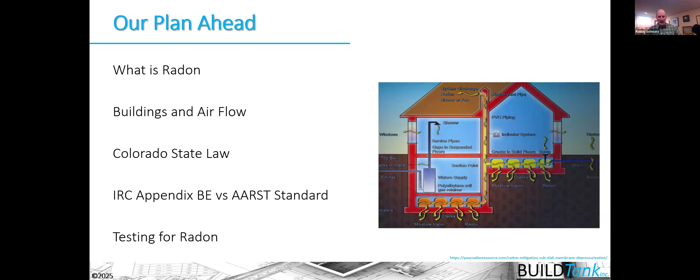Today we're going to be talking about radon. We're basically going to do an overview of radon and radon issues in our new houses. Our plan is to talk about what radon is, building and airflow, and we need to talk a little bit about the building science. There's a relatively new Colorado state law governing how radon is being tested and mitigated in our buildings, so we need to talk about that in relationship to how the International Residential Code appendices work and the standards that the state is referencing that isn't the International Residential Code. Then we'll talk about radon testing a bit as well.

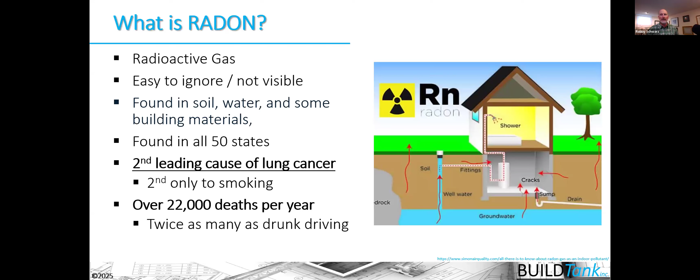So why do we want to talk about radon? Radon is a radioactive gas that's pretty easy to ignore because it's not visible, and we can't really taste it or smell it or anything like that. So it is something that has been ignored for far too long. And we know that it's been ignored for far too long because it turns out that it's the second leading cause of lung cancer in the United States and causes a significant number of deaths each year. So we want to make sure that we are taking it seriously and ensuring that we're trying to keep it out of our houses here.

So testing for radon hasn't been a commonplace thing until really recently.

We really started testing in the 1990s when it became a more active understanding of radon in our houses and how it's affecting us. If you're interested in hearing more about the history of radon, I'll do a shameless plug for my podcast where I spoke to a professional who researched radon's history back to the Middle Ages.

It's an interesting talk about how we got to our modern day lives, the building of nuclear plants, and how we came to understand radon's importance in our modern homes. Indoor radon levels have been rising in our houses because we haven't really understood the sound building science that governs how air flows and moves in our houses, and what air is carrying in our houses. So we've been building our houses to meet our modern day expectations.

One of the things we've been doing is building our houses tighter and tighter. But we also need to ventilate that house correctly so occupants can gain control of airflow, moisture flow, and thermal flow, which you've heard me talk about quite a bit. We also need to incorporate this idea of controlling radon gas from entering our houses before it causes a problem. So we're going to talk a little bit about the building science there.

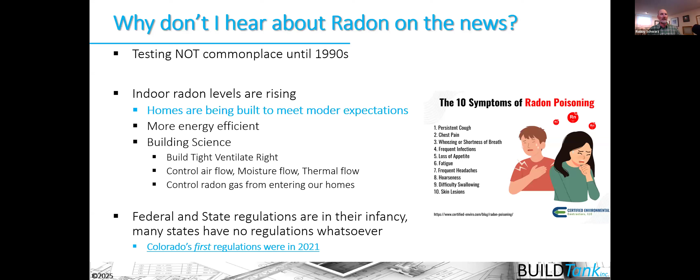Federal and state regulations have really been in their infancy. In 2021, Colorado began to regulate radon testing and mitigation and who can do that, making sure people have the right credentials to work on our houses. This has created a little bit of not conflict, but there is a chapter in the IRC that talks about radon, and that chapter and appendix has changed a little over time from the 2018 IRC.

We called it Appendix F. Now in the 2024 IRC, it's Appendix BE. But that appendix hasn't changed that dramatically. They define radon gas in the IRC as a naturally occurring, chemically inert, radioactive gas that is not detectable by human senses. It can move pretty readily into our houses because of the building science wrapped into how air moves in and out of our houses.

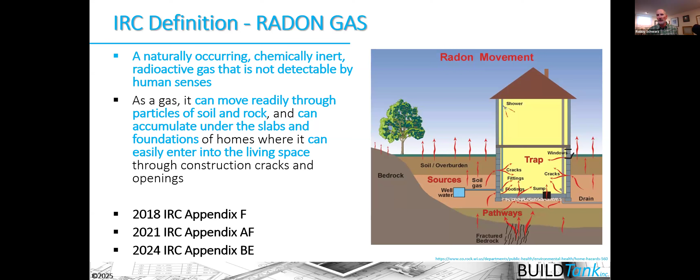So we're going to utilize the IRC appendix as a way of talking about radon, but we have to understand that the state is looking at radon testing and mitigation using a different standard, developed through an ANSI standard development process. Jurisdictions around the state are utilizing these appendices from the IRC.

So when you're looking at radon in our houses, we need to think about radon resistant construction, which is largely governed by the IRC. But again, we need to think about it in relation to the IRC, but not just the IRC, but also this standard that I'll introduce you to in a second.

The reason it's so important is there's a radon map that the Environmental Protection Agency put out. In our state, Colorado, we see that we have radon zone 1 and 2 throughout the state. We don't have any areas of low radon potential in our houses. If you're building in radon zone 1, it's still not necessarily determinate of whether that house will be capturing more radon, or that you have to do more mitigation than anybody else, because it's really site specific and depends on the soil conditions underneath your house.

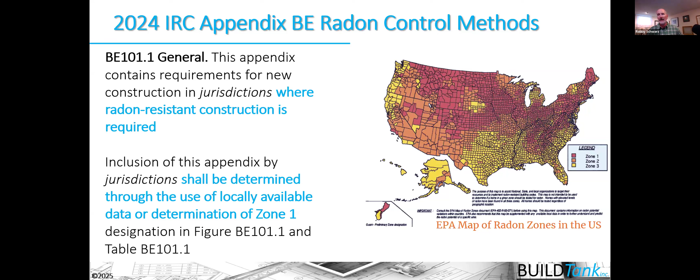So this radon map is giving us the potential. You have higher potential for radon in radon zone 1 than you do in radon zone 3. The idea is that we should take that seriously and build radon mitigation systems in all our houses that are in radon zone 1 and 2, so we can better ensure not only the safety or comfort of our buildings, but also the safety of the occupants in those buildings.

In 1910, people were willing to work with that house. They were willing to put on a sweater, shovel some coal, or put a log on the fire to keep warm. Where in today's world, in a modern house, we really want to walk around in our underwear from room to room and floor to floor and be comfortable in that house.

That really means we've had to change the way we build our houses. When we began this change, we had quite a number of failures. Then we began to understand the science of how houses interact with the environment around them. And we're now able to build a house that's efficient, safe, and durable, and also meets our modern day expectations of comfort.

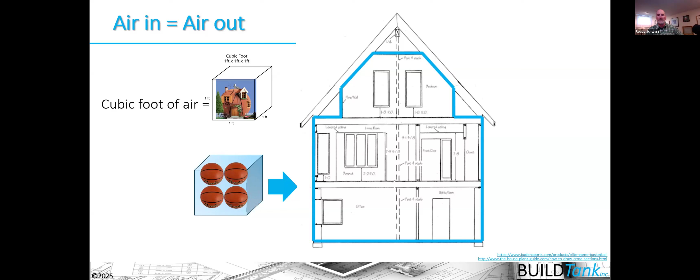Whenever a quantity of air goes into the house, a quantity of air has to leave the house, or vice versa. If air goes in, it has to go out. If air goes out, it has to go in, in relationship to the building thermal envelope and the fixed quantity of air that envelope captures.

So there's a specific volume of air inside every single house. If a cubic foot of air leaves the house, then a cubic foot of air has to be replaced and come back in, and vice versa. We always talk about air in relationship to houses as air in equals air out, or air out equals air in, because there's this specific volume of air that you can calculate.

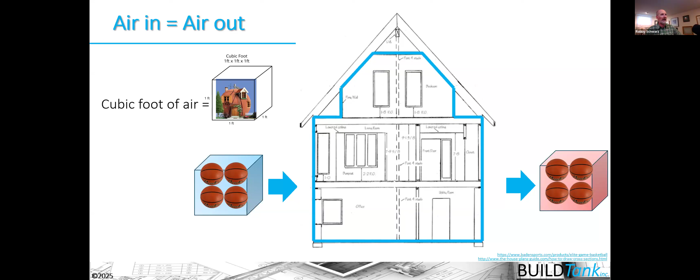And in fact, you need to calculate it in order to do a blower door test, which we talked about last week. But the other interesting thing about air is that it's not necessarily smart.

It doesn't necessarily know that if I open a window, it's supposed to go in that window and ventilate that house or cool it off and then go out the other side. Remember, we talked about last week that we need a hole and we need some sort of driving force for air to move through that hole.

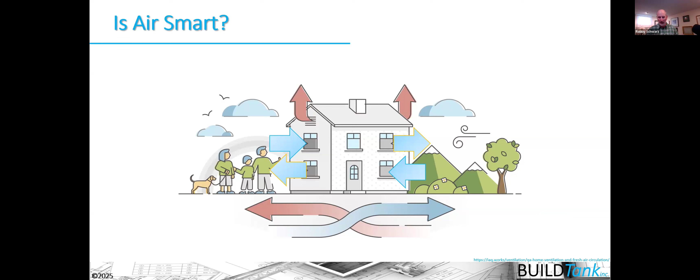So when I've got a house built over a crawl space, for example, I can define the building thermal envelope as excluding that crawl space. But when I put vents in that crawl space, I can't tell the air it has to go in through this vent and then go out through that vent. It might do that, but it's not necessarily going to do that.

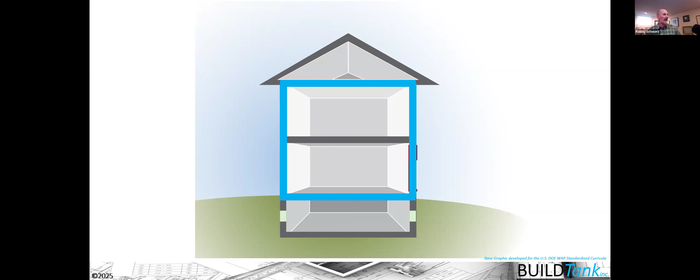The laws of physics are working against that air because we have this thing called stack effect. Stack effect is one of these things we call a driving force, something that creates a difference in pressures. If I have that pressure difference across the boundary and I have a hole in that boundary, then air in this ventilated crawl space, instead of going from one vent to the other, is actually going to act as a low side hole.

What happens with stack effect is that when air warms, it naturally rises. So as air comes into the crawl space, even if it's 0 degrees outside, it won't be 0 degrees inside that crawl space. The air coming in that vent warms and hits the bottom plane of the building thermal envelope. If there are holes across that envelope from plumbing vents, HVAC vents, or other penetrations, that air continues to rise as it warms, enters the house, and continues to rise to find a hole on the high side of the house and leave. So as it's leaving on the high side, it's coming in on the low side.

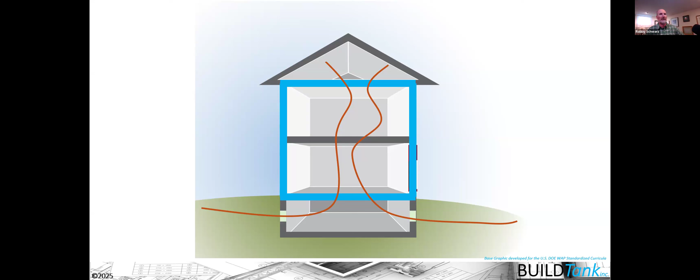In the IECC, when we talk about making houses tighter, we concentrate on the high side holes and low side holes because we can't impact this natural physics of air warming and rising. So when we think about air, not only from a building science perspective, we also want to think about air as a freight train, a transport mechanism that carries heat, moisture, and pollutants like radon in and out of our houses. We need to gain control and predictability of airflow because that air is carrying these things in and out.

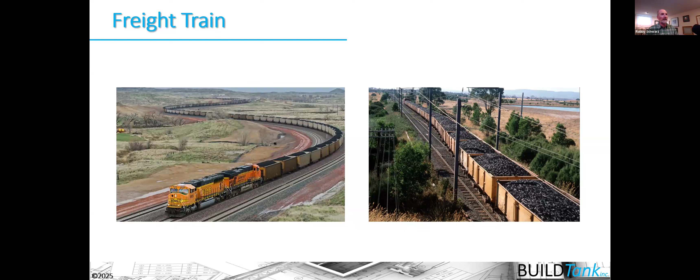How it's carrying it is through driving forces across our building thermal envelope that we don't have much control over. We don't control the wind blowing on our houses, yet wind creates positive pressure on the windward side and negative pressure on the leeward side. Therefore it's pushing air in through holes in the building thermal envelope from one side, or it might be sucking air out on the leeward side.

In the same way we talked about stack pressures inside our houses, we also have mechanical pressures. Just when I turn on a bath fan, I'm exhausting air out of that house. And we just learned that any air that leaves the house has to be replaced by air coming back in. So the simple bath fan or kitchen hood can exhaust stale, moist air out of our house, but we don't necessarily know the quality of the air coming back in.

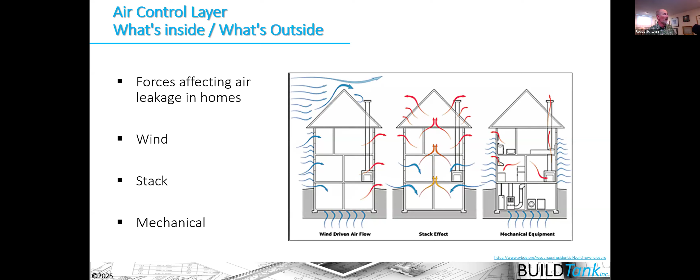We know the soils we build our houses on top of are porous, and air is moving through those soils, and that air might contain radon gas as well, moving through the soils and potentially into our houses. So the same sound building science principle works with radon mitigation as it does with trying to gain control and predictability of moisture flow and thermal flow inside our houses. We want to keep that radon gas outside of our houses.

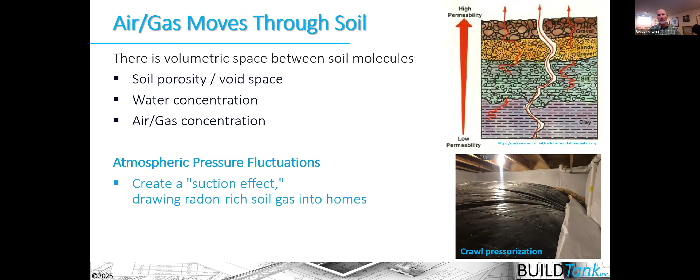So we want to build our houses as tight as we possibly can, then add other systems to help us gain better indoor air quality, like proper ventilation systems. Because radon comes from the soil, we're primarily concentrating on the low side of our house to keep radon out. So we might move to the IRC appendix, in this case for the 2024 IRC, to learn rules about how we can keep radon gas out of our houses, because I can control the holes in the building thermal envelope, but I can't necessarily control the pressures in it.

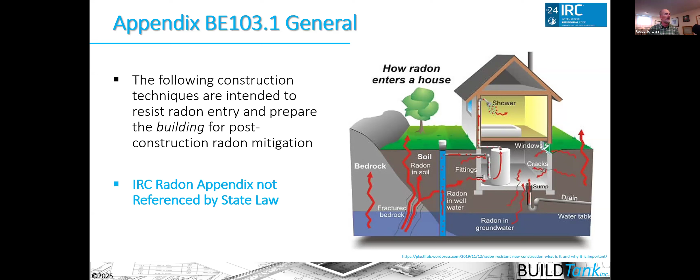So if I can control one of those two things, then air isn't going to move into the house. And radon content takes it a step further, trying to remove the gases before they even have a chance to move across the building thermal envelope and into the house, taking it to the outside instead.

So I wanted to introduce the state law that was put into effect on July 1st of 2022 for all radon work happening in Colorado. The Secretary of State has created this rule that governs radon mitigation, radon licensing for measurement, the professionals doing that measurement, and also the practices of radon mitigation in our houses.

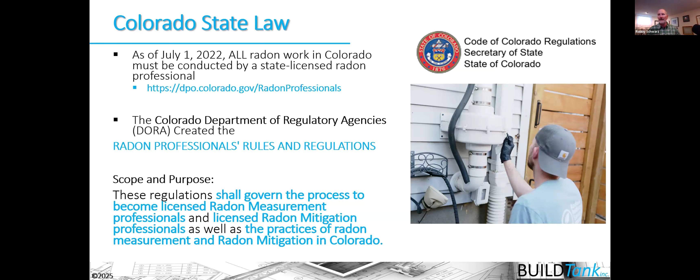When we're talking about radon mitigation, we don't want to confuse that as being only for existing homes where radon has been deemed to be an issue. We also can mitigate the potential for radon coming into our houses in new construction.

In fact, these rules are utilizing a standard rather than the IRC code. They're using this AARST standard, which stands for the American Association of Radon Scientists and Technologists, that have put this standard together. It's not completely different than the IRC appendices, but it is different in some ways.

This standard looks at new homes, homes and multifamily buildings, radon in water, and offers a measurement system quality assurance program. It continues to talk about new construction with 1 and 2 family dwelling units and townhouses, as well as multifamily buildings and existing homes.

So if you want to know more about the standard, you can go to the AARST website and pull down that standard there.

Now, we're going to continue using the IRC as a way of understanding the issues with regards to radon and how to prevent radon gases from moving into our houses. But again, if you're building houses, you need to search out professionals that understand the AARST standard and are going to be utilizing that standard, because the state has gotten involved now in helping to ensure that these professionals have the proper credentials and understanding about how to mitigate and test for radon in our houses.

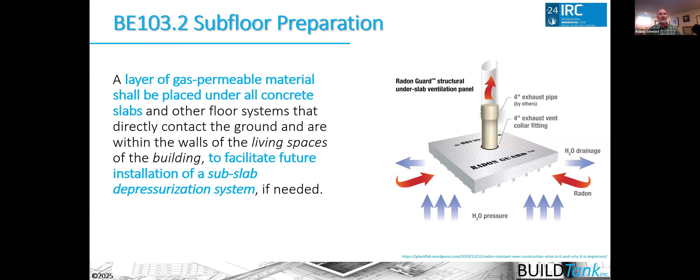So they're saying we have to lay a gas permeable material underneath the foundations of our houses—underneath that lowest level of the house, that slab to the basement, or if we're on a slab on grade, or think of a crawl space, the dirt floor of a crawl space. We want to put this air permeable material underneath our layers, underneath the crawl space as well, to protect and try to remove any gases from underneath the soil.

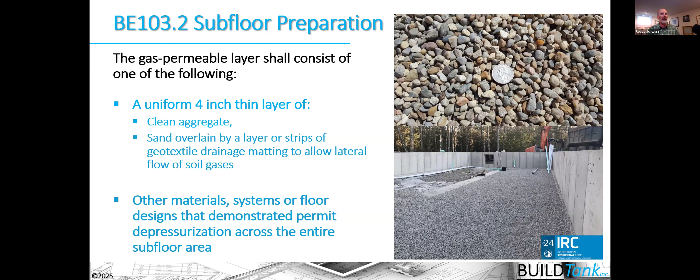So in these foundations, we'll put this uniform layer, a 4-inch layer of clean aggregate that gives us a clean airspace between the aggregate where we might be able to collect radon gas and move it up and out of the house before it has a chance to even go through a potential hole through the slab or vapor retarder or air control layer that we might put down over this aggregate.

So the next step is to install some type of membrane over the aggregate. We often, in the building construction world, call this a vapor retarder, but in the radon world, they call it this flexible sheet material complying with a specific section of the code, which shall be placed on top of the gas permeable material. So we have gas permeable material underneath that aggregate, and then we have impermeable material on top of it to stop that gas from moving up into the house.

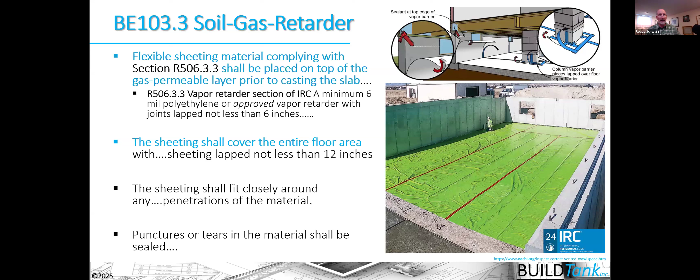And this layer, this vapor retarder type material, needs to be sealed to the foundation. Its seams need to be sealed and overlapped. From the code perspective, it only requires a minimum of a 6 mil type poly material, but these thicker layers, the 10 mil materials, are often better options for us to think about and move to utilizing.

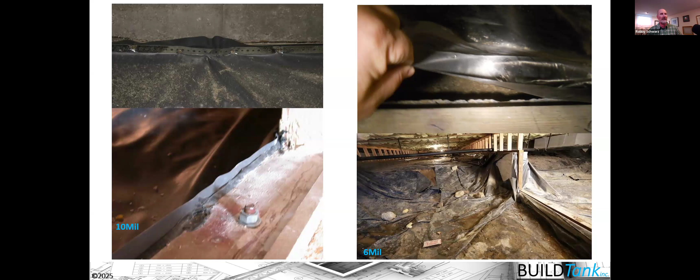But they need to be sealed to the perimeter of the foundation, their seams overlapped and sealed. There are requirements for how to do that in the IRC as well as in the standards that the state has adopted. So our ultimate goal is to get an airtight slab. The appendices talk about making sure we've sealed off any entry routes for potential radon—sealing any floor openings, concrete joints, condensate drains, and sump pits should be sealed off as well.

And you can see that that's really similar to what the IECC is doing as well in table R402.5.1.1, which is the air barrier, air sealing, and insulation installation section of the IECC. It's also telling us that we need to seal off all penetrations through the concrete foundation. From an air leakage and energy perspective, it's equally as important from a radon perspective here.

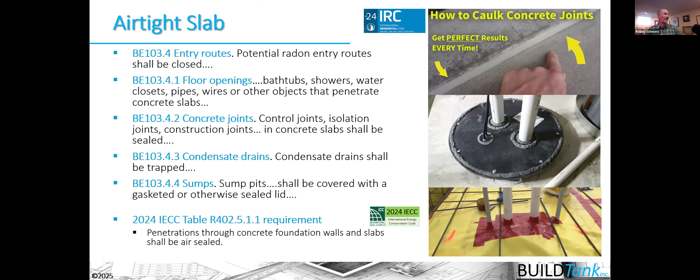So really, when you're building an energy efficient house to the 2024 or 2021 IECC codes, you're also beginning to build a house to the requirements for radon reduction in that house as well. So it's not going to be a big cost impact there. You're just doing a couple extra things because you're already required to be airtight.

The other thing that the Appendix BE says is that air handling units in crawl spaces shall be sealed to prevent air from being drawn into the unit. So that really mirrors what the IECC is saying as well, that your air sealing of your duct system needs to be done really well. You can see that the IECC includes duct sealing of air handlers and duct testing as well to ensure that duct system is tight.

Because remember, especially on the return side of our duct system, if we have a lot of leaks, we could be creating negative pressures in that zone if that return system is located in a ventilated or unventilated crawl space. We could create negative pressures in that space that might draw in pollutants if we hadn't gotten the building thermal envelope air barriers, vapor retarders, or disconnected the crawl space from the soil underneath. We could have problems by creating negative pressures through leaky ductwork there.

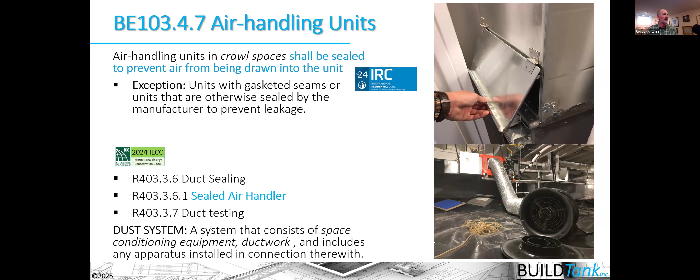So the appendices for radon and the requirements in the IECC are right in alignment with each other to create tight spaces, to create tight duct systems in those houses. It continues here to talk about these things, and then it talks about

and it's located in the air permeable aggregate. And then it's collecting gas in that system and just using stack effect to bring it up out of the house, because that pipe is located inside the conditioned space. That air is going to warm inside the pipe, and just through natural stack effect, it will take it up and out to a high location on the roof.

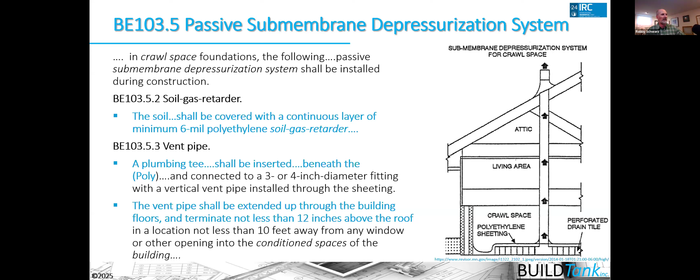So the appendices in the IRC will give us definitions of how to install this pipe and install the system underneath the aggregate that we've already installed, and that membrane, to keep it out of the house.

And it continues to talk about it. And this is just another example, another picture of what we call a passive radon system, where the system is collecting gas and then moving it to the outside.

But the other thing that the IRC appendix tells us is that we have to have the capability of installing an active radon system, which would mean that we're going to attach a fan to this system and we're going to pressurize or depressurize the system so that we're sucking air underneath this plastic membrane that we've installed through the aggregate, and we're going to actively move that air up and out of the house before it ever has a potential to move into the house.

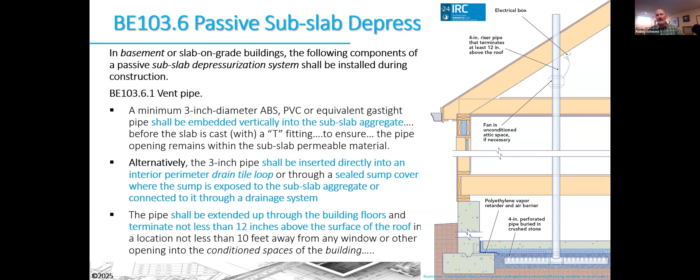So you have to also plan for that by having wiring installed in the right locations. In this case, you can see it's up in the attic, because you don't want to pressurize or depressurize the system down low in the house, because if there happens to be any hole or break in the pipe before it gets to the ambient outdoors, you might be pushing it into the house rather than sucking it out. So you want to have that fan up in the unconditioned attic system, which means you also have to install some electricity in there so that you can install that fan later on.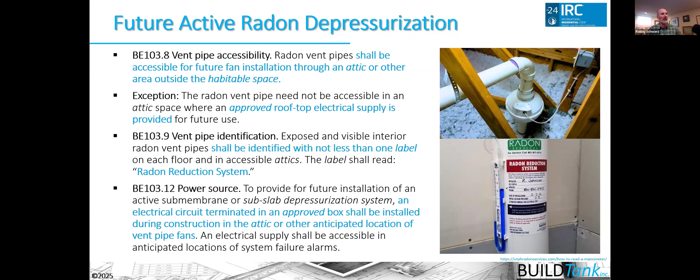It's not a requirement to install it at the beginning, but it is a requirement to have electrical outlets up there so that you can install these fans later on in the system after you've tested the system and determined if it makes sense that your passive radon system isn't actually working.

So the next part of the IRC is talking about testing these systems. These testings have to happen after the blower door test, and the reality is it should happen significantly after, because you've evacuated all the air out of the house when you do a blower door test. So you want to put the house into testing conditions, which means all the windows and doors need to be shut up for a period of time before you do a test.

If you have a radon system and an HVAC system installed, you also want to make sure you've tested after the HVAC system has been installed, because that can change the potential of radon entering our houses. Those fans can create negative pressures that will suck in air through holes in the building thermal envelope, and that envelope includes the boundary to the soil as well.

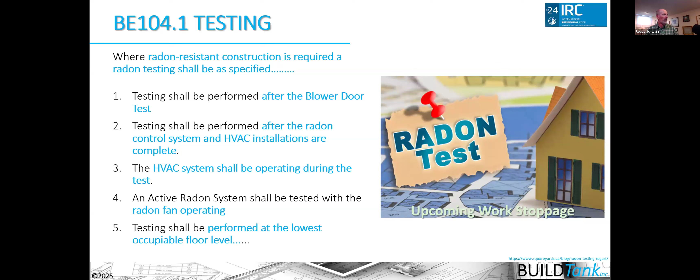We want to perform the test on the lowest occupied level of the house, and it continues on to say where we might not want to have testing done, like in closets, for example. This testing needs to be done with the windows and doors to the exterior closed, and they need to be closed for at least 12 hours prior to doing the test.

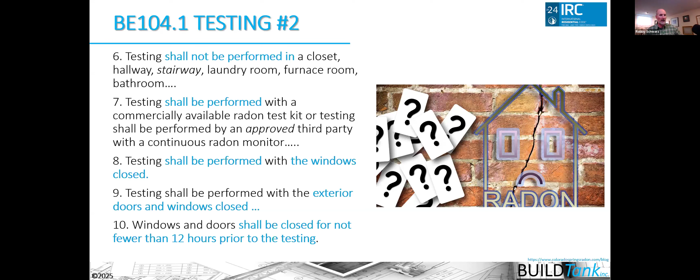So you're going to do your blower door test, and you're going to close up the house for at least 12 hours before you do the radon testing in the house. And then it needs to be performed by a builder and registered design professional.

This is kind of where the big changes between the IRC appendix and what the state is referencing as the standard they're utilizing is that it has to be a professional that meets the requirements of the AARST standard now, not just approved by the code jurisdiction. So that means there's a little bit more professional designation to the radon professional doing these tests. You obviously need written results of the test.

The testing criteria is that it needs to be under 4 picocuries per liter. That's kind of been the action level that's been set. If you're above 4 picocuries per liter, then that inactive or passive radon system that you've installed needs to become an active system.

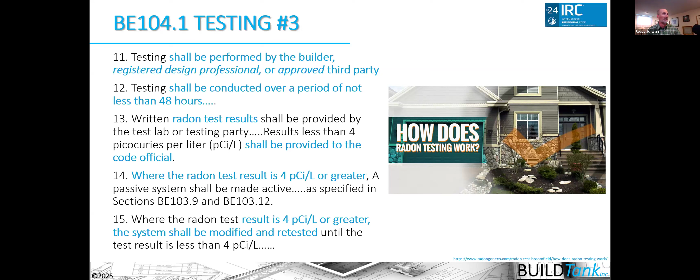It also might be an indication that you want to do a longer test, and we'll talk about testing here in a second. But these tests are really indications of radon presence in our home, and you want to make sure you understand the potential risk. So you might want to do an additional test, as well as changing it from a passive system to an active system.

This is an example of the AARST standard. It's a long standard, 42 pages, but it talks about a summary of the testing procedures that need to be done. Remember that when we get into testing, this is one of the big differences between the IRC appendices and the AARST standard that the state of Colorado has adopted.

It talks about time-sensitive protocols and extended testing protocols, and the professionals doing this testing need to be certified, in essence, to be able to do these tests. So you always want to look for a certified professional that's been able to demonstrate they can do the testing in relationship to the AARST standard, not to the IRC.

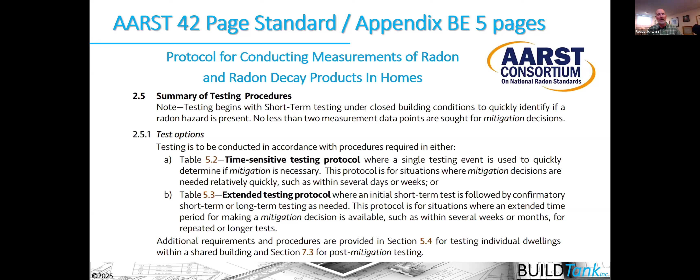That's kind of where some of the confusion is happening, because the state has created these standards, but all the jurisdictions around the state are still potentially, if they're requiring radon resistant construction, utilizing the IRC section. Okay, so let's talk a little bit about the different types of testing. Oftentimes you'll hear about testing being needed or required during the sale of a house, or during that transactional process of selling a house.

Often we'll use these short-term testing devices like activated charcoal radon testing, or some type of continuous radon monitoring. Basically, they're collecting the radioactive isotope, and then you send it to a lab, and you can get an idea of the quantity of radon that's in that house.

Remember, it's based off of this 4 picocurie measurement. Picocurie is a measurement of radon. And if you're above that 4 picocurie level, then you start hitting the mandatory mitigation requirements of the codes and standards. But even if you're close to 4 picocuries, you're going to want to assess your own personal willingness to live with that level of radon in your house, knowing that radon is a carcinogen and it's going to potentially cause problems for you from a health and safety perspective.

There is also long-term testing. As I said last time, when we were talking about blower door testing and duct leakage testing, we're testing a moment in time. Your house is going to leak differently every day of the year. When I do a blower door test, I'm giving you an indication of how air leaky that house might be at a particular moment in time.